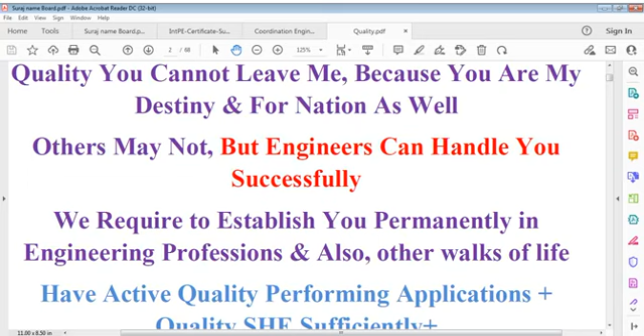Means I talk to quality, though there is no physical form of quality I'm talking of. I cannot say I'm talking, I just imagine this is quality and I'm interested in talking to you. And this means I am interested in talking to myself. That's the only thing, because I assume there's a quality, and quality is an imagination, an image, but it's no image - it's in my mind.

Just to tell people means what I'm thinking about. It's a kind of contemplation of my mind. I talk to quality and coordination. This is neither coordination practical or physical, nor quality - neither both are.

So we talk to ourselves because I am sleeping, my own, I'm sleeping, I'm not awakened, way others are sleeping. So during sleep you talk to some soul. So I miss my soul, when my eyes are open I work. So for that I say I talk to someone and I talk to myself.

And myself is not a friend, I want to make it friend. Because there's a distance between my physique and my soul, and that distance will be bridged by my own design. That's why I say quality and coordination is that bridge, which is very important. And that importance forces me to do something that's required.

And we say that we have to establish quality permanently - permanently means in your mind permanently. You should not think below some level of quality. Yes, you can think of working on that, how to design that, but you should not go below that level, and you have to fix your level yourself. Nobody will fix it for you. Designer can fix and you can fix, and both can fix together.

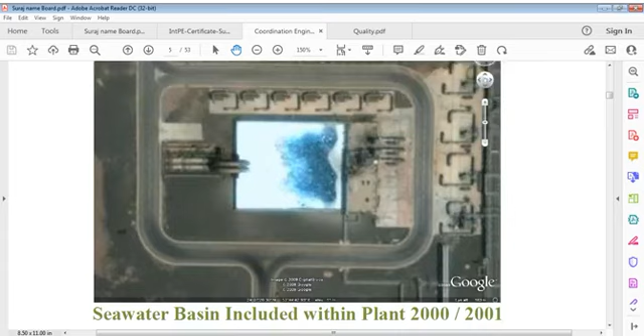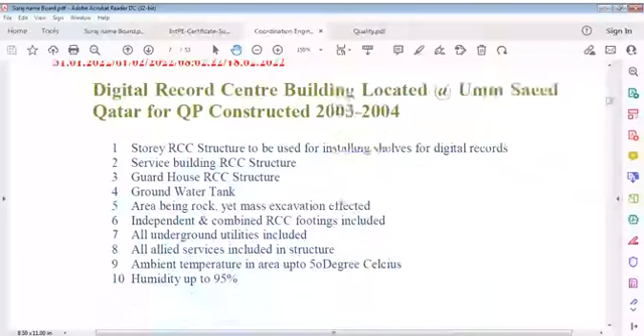So much is involved in this, though it's a very small part of the major project. The seawater basin here works like that, and we have to see that. The record building, we'll talk of that also. These images I've generally taken from Google Earth, don't take it otherwise, though I worked on these projects everywhere.

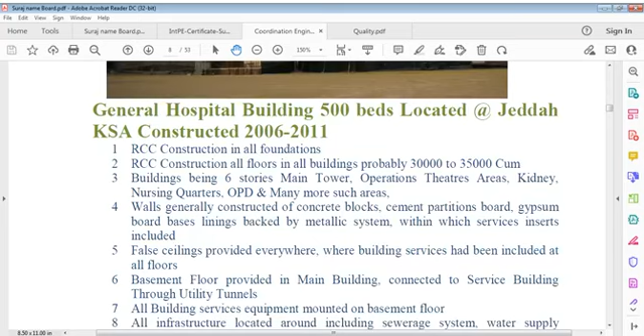This is from many projects in my career. This is a hospital building, and this also we will talk of. And also we have this LNG plant, which we have discussed already, but we'll discuss more.

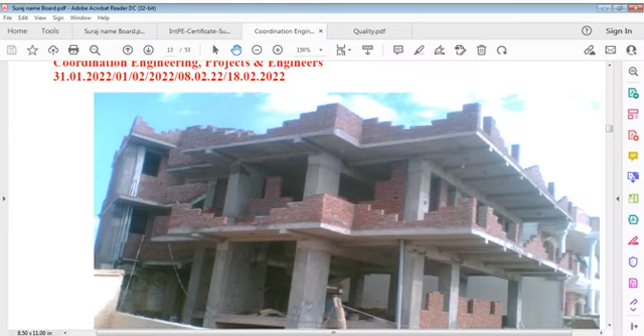This is during construction stage. There is another building also in initial stages of structure, already done - I'm just taking from my career projects. This very small house, you can see RCC construction there and brickwork.

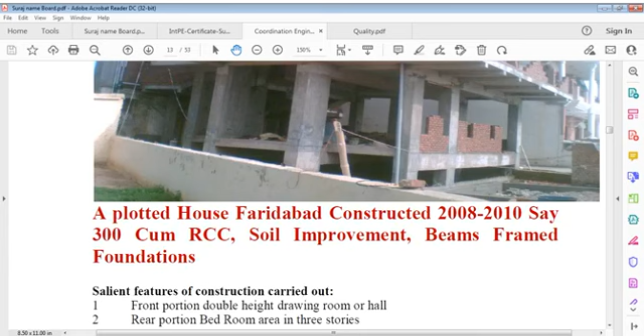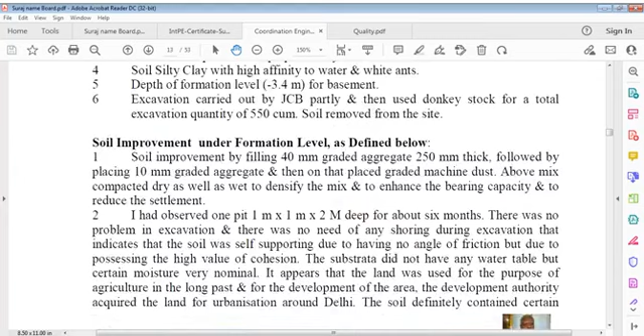Say 300 cubic meters, a small house, not big, but 300 cubic meters, not a small quantity for a house. Soil improvement, beams, framed foundations, etc. I like to add, I like to repeat this. You can say there's a long note here, which I can read for you if you wish, just for information.

It's talking about the salient features of construction carried out, and if you can blow it up, I think it's better. It's at 150, I think we can't blow more than that, so it won't work, so we keep it as it is, no problem.

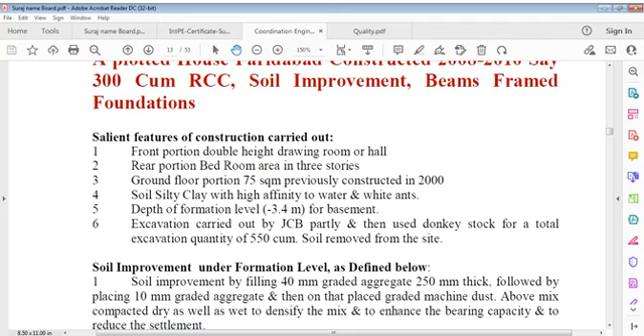So we have to see the front portion, double height drawing room or hall. This is in front, this is the drawing room, we generally call it a drawing room in houses. And also its rear portion has bedroom area in 3 stories. Before all this, I can show you a little glimpse of the plan.

If you see this, only a few of 2 drawings I have put, not all. I can blow it up for your reference, it's better to blow it up for you. You can see this here, it's a kind of plan here. I cannot blow it up more than this, so let me blow it up to 200, let's say 250, so that it is clear to you.

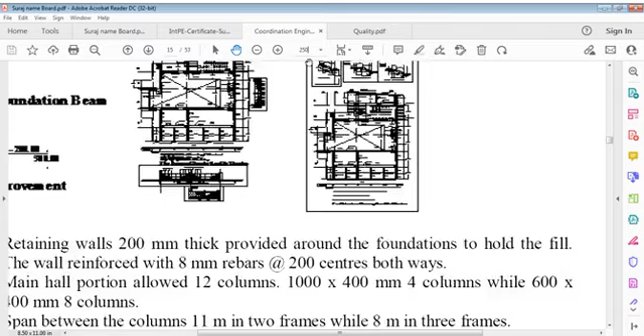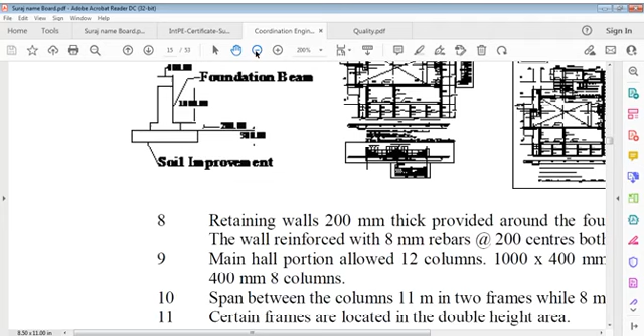This kind of plan, showing the front portion and the rear portion here, and these are drawings at different levels. This line means no floor at this level, meaning double height. And there is a foundation plan here. This is only a few sketches I added, not all - I'll show you all one by one, but now I'm trying to explain about the soil improvement, etc.

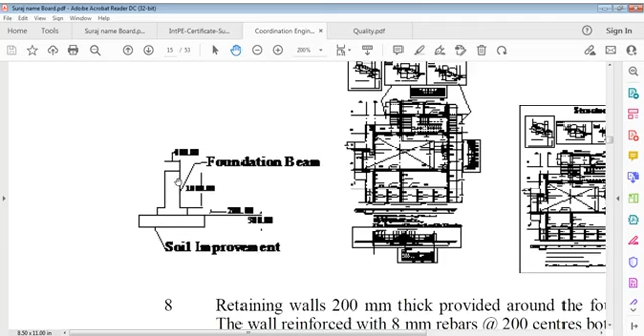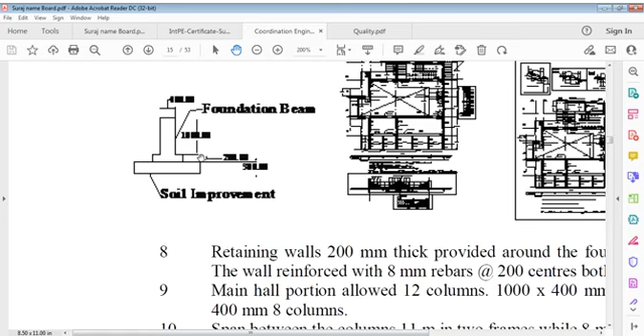It is foundation here, that's important point. You can see this is foundation, and it's written soil improvement here. This is foundation, a soil improvement, this is a rectangle, you can say, in sections I'm showing to you, and this is foundation here, RCC foundation in form of a beam, titled foundation beam, and depth is clear here, but not readable at this moment. We will read this is say 200mm thickness, and this is 1 meter or say something else, and whatever design thickness comes, we have to provide that.

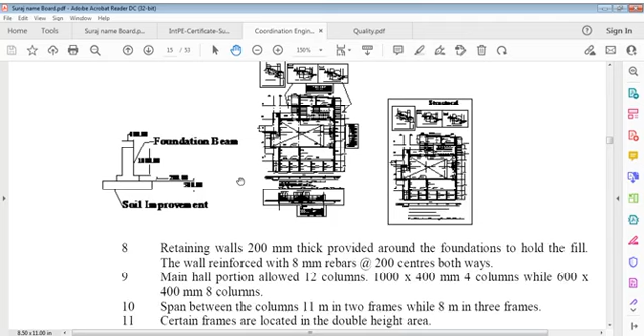So continuous means it's not just a foundation or isolated footing, it is in continuation all over there in foundations. I'll show you later on. I'm just giving you a glimpse of this, what we have to talk, and I can read for you what is there, what's not there, and we can see that.

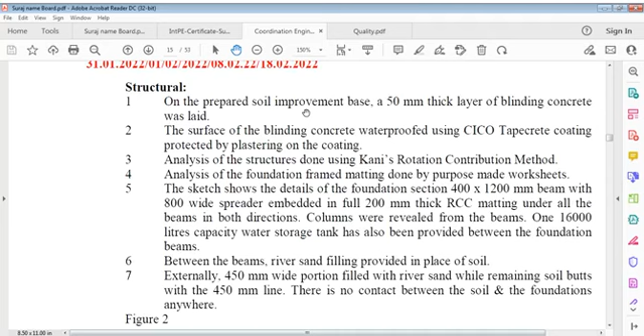Here is what it is. Yes, it is about this house. I did it for you so that you can understand. Again, I say what is this? This is a plotted house Faridabad. It can be anywhere. I'm just taking this.

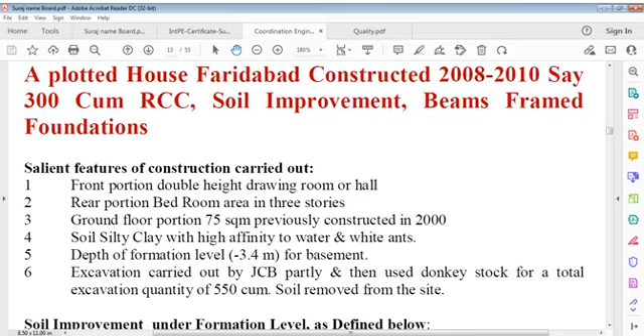Salient feature of construction, this is a very minimum requirement salient feature. It is front portion double height drawing room or hall, as I showed to you on that drawing. Rear portion bedroom area in 3 stories, and it's a ground floor portion, 75 square meter, previously constructed in 2000. So you can say it is a small portion constructed about 22 years back, and soil is silty clay.

With high affinity to water and white ants. When I say high affinity, it means it is clay. Certainly it is porous, we know that property of clay. It's porous, it's high, it's porous soil, and of course it's important. It's not good for foundation, but we'll talk of that.

Then depth of formation level is minus 3.4 meter because it constitutes a basement also or cellar floor. That's why it's minus 3.4 meters, meaning from plinth level down to 3.4 meter formation level.

Excavation was affected by excavator, we call it JCB, that's a company name, but it's an excavator. Partly it was done by excavator and partly by taking out soil using donkeys, because in depth the machine could not go into the constrained area. So excavation was carried out by JCB partly, and then used donkey workers to remove soil from site. Now this is just a small

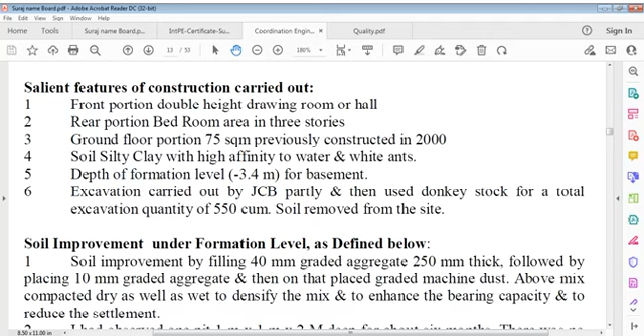They should be happy, or they should please know all this, because this relates to the life of everybody. So then I say soil improvement under formation level as defined below, and this is very, very important, significant item. Well, I think every member

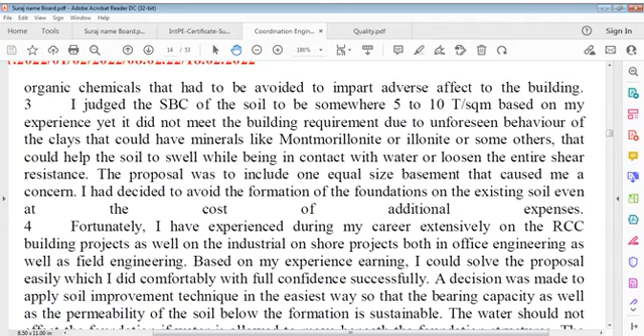Fortunately, I have experienced during my career extensively on RCC building projects as well as on industrial onshore projects, both in office engineering as well as field engineering. Based on this earned experience, I could solve the proposal easily, which I did comfortably with full confidence, successfully.

A decision was made to apply a soil improvement technique in the easiest way, so that the bearing capacity of the soil as well as the permeability of soil below formation is sustainable. By sustainable, I mean water should not affect the foundation, if water is allowed to move beneath, it should remain beneath.

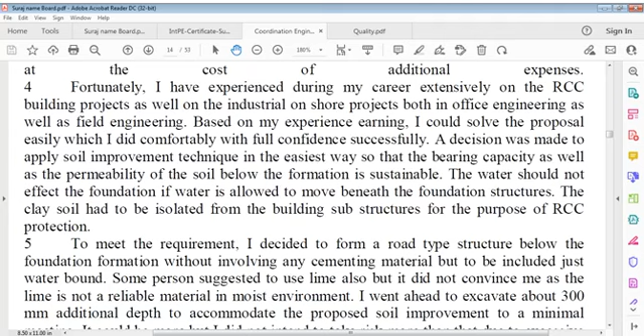A decision was made considering bearing capacity as well as permeability of the soil below, which are very important here, to decide whether water should be added to the site or not. It's a very important part, we'll decide that, and to meet this requirement we consider a fill or soil improvement.

It is a kind of small road structure, a water-bound type road to meet the requirement. I decided to form a road-type structure below the foundation formation without involving any cementing material, no need of cement, just water-bound. Some suggested me to use lime also, but that did not convince me, as lime is not a reliable material in a moist environment.

I went ahead to excavate prior, so we have to concentrate on these points one by one and see what that is. I went ahead to excavate about 300 millimeter additional depth to accommodate the proposed soil improvement, to a minimal extent.

It could be more, but I said I did not intend to take more risk than that, due to excessive depth of excavation, where on two sides there was an existing building.

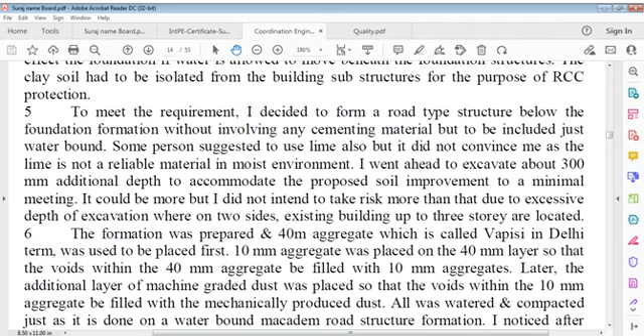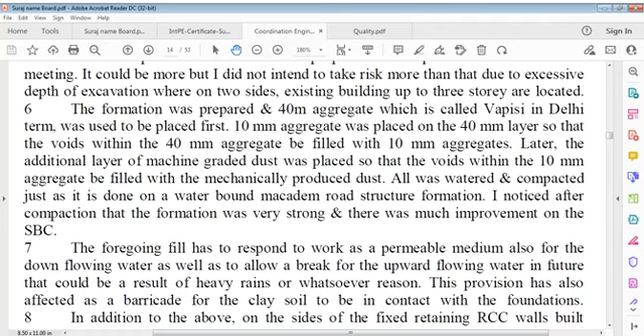All was watered and compacted, just as it is done on a water-bound macadam road structure formation. It was noticed after compaction that the formation was very strong, and there was much improvement on safe bearing capacity. That was our milestone, to increase bearing capacity of the formation level.

So this was just one very small part of the improvement. And so for the foregoing fill, we call it fill. Of course it's an improvement part, soil improvement part, but fill. This fill has to respond to work.

Foregoing fill has to respond to work as a permeable medium, permeable medium also for down-flowing water. What do you mean by that? You understand permeable medium? What I mean by that?

It is a graded section, you can say graded fill. Graded in a sense that 100% voids are not filled. Permeability factor works there, it's not porous. It's opposite to the property of clay. When we talk of clay, we talk of porosity, pores. Clay has pores, we cannot fill those pores, and that's why we call it porous soil.

Clay is porous. It can have much water content in it, but this water content cannot move, cannot be mobile. But when sand is concerned, it is opposite to clay. Mobility of water is permissible in sandy soils.

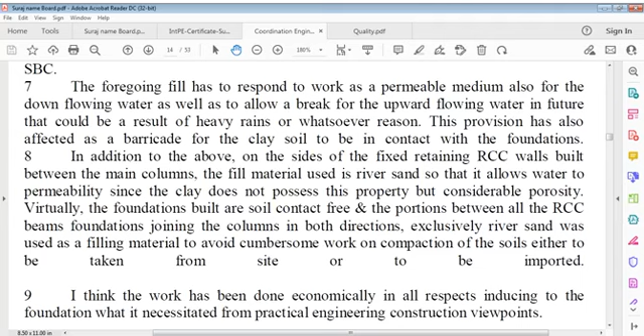Now we go further on this, that we got this improvement, and we use river sand. Of course, we avoided time wastage. Beam foundations were used between columns in both directions. Exclusively river sand was used as filling materials to avoid cumbersome work.

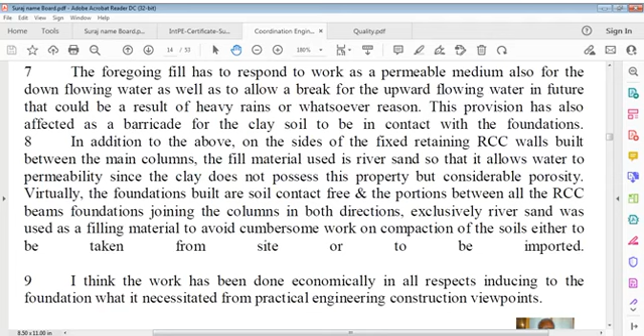Now we go forward. I think the work has been done economically in all respects, inducing to the foundation, what it necessitated from a practical engineering construction viewpoint. Now, what is it we're talking of? Oh, that's a very important point.

On prepared soil improvement, let me see—I'm feeling a little cold, why it's cold, that's the important point.

It's 14°C and the dew point is 8°C, a little less than 15, so expected is 27 in the day and 13 at night. So it is 14 degrees now with 45% humidity and 8 degrees dew point, and that's why I'm feeling a little cold now.

So we are talking on prepared soil improvement base: a 50 mm thick layer of blinding concrete was laid. It can be 50 mm, you can do more also, no problem.

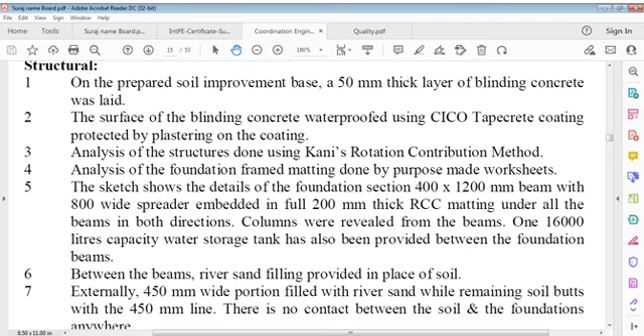Retaining walls, 200 mm thick, provided around the foundation to hold fill, with wall reinforcement using 8 mm rebar.

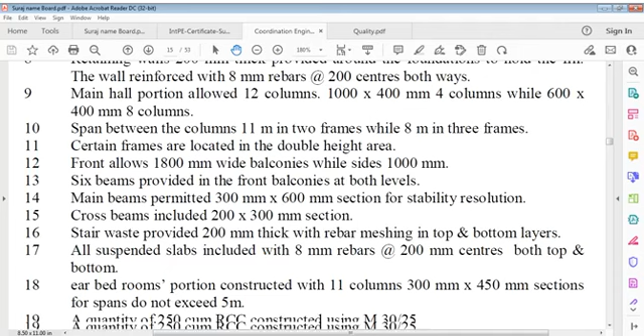So the retaining wall was there. Now we can just show a glimpse of this drawing first.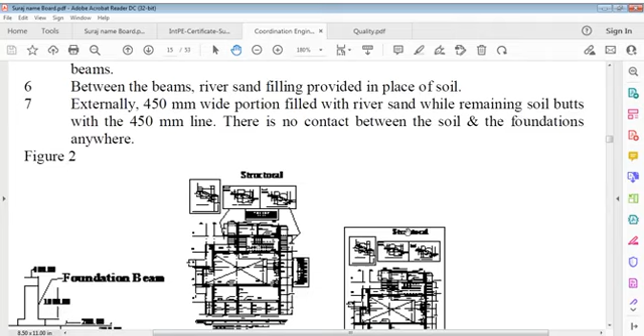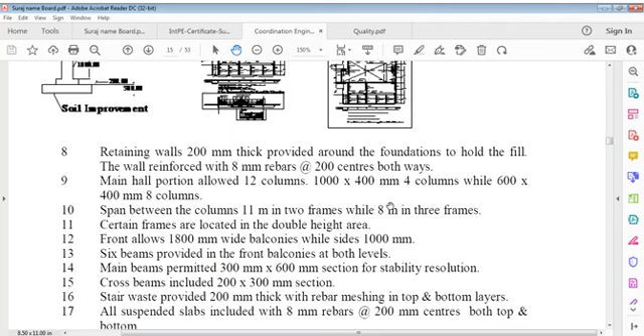You can see this foundation. Now, retaining walls 200 mm thick are provided around foundations to hold fill. Wall reinforcement uses 8 mm rebars at 200 mm centers both ways. The main hall portion has 12 columns: 1000 by 400 mm for 4 columns, while 600 by 400 mm for 8 columns.

Hall columns are 1000 by 400 mm at total height, and 4 columns of 600 by 400 mm, 8 columns also at total height. Span between columns is 11 meters in 2 frames, and 8 meters in 3 frames - 11 meters and 8 meters. Certain frames are located in the double height area.

Front hall has 1800 mm wide balconies, while sides have 1000 mm wide balconies. 6 beams are provided in front balconies at both levels. We'll show that later on. 6 beams provided in front balconies at the bottom.

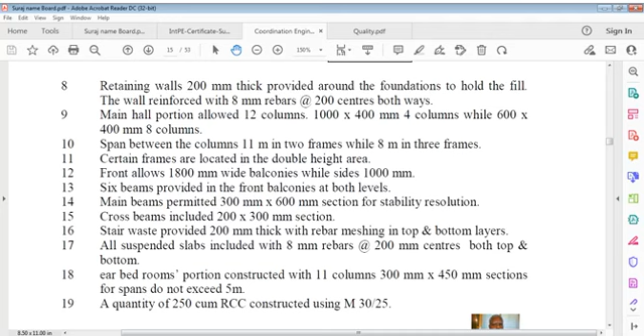I think if you see this, it's clearly here. If you can see, I'll show you that sketch. I think it's somewhere in the plates - if you go back.

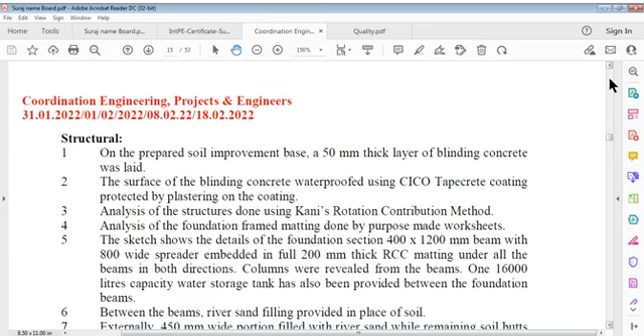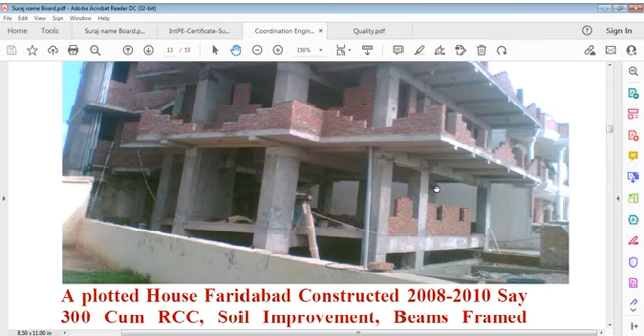This is a glimpse of what I said. If you see the basement here, you can see 3 columns here and 2 columns - one here and one other. Here, this column is the main hall column, and this one as well is also a main hall column. So this is one frame, this is another frame, and this is another frame.

Likewise, these two frames form the house, and there's another 3-column frame here - the staircase is here. You may see that.

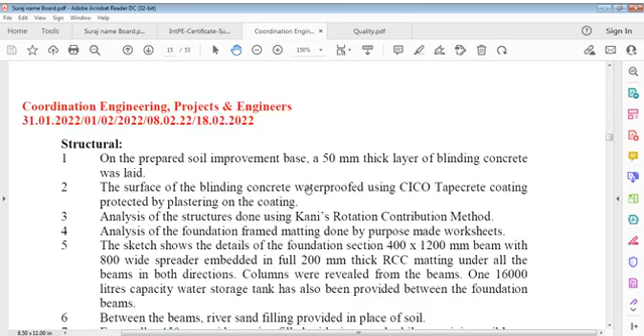This is the beauty of this building, structural beauty. You can see that. Here is that one, so let me read it for you. It's written here, and it's there.

You can see the retaining wall. It's a little boring there. I'm going slow. So the cross beam is just shown to you - 200 by 300 section. Stair waist is 200 mm thick.

200 mm thick stair waist with rebars meshing in top and bottom layers. Not an ordinary stair as usually we do - I converted that to a beam, with top mesh and bottom mesh, 800 mm mesh.

Here all suspended slabs included with 8 mm rebars at 200 mm centers, both top and bottom, no temperature reinforcement, main reinforcement, one reinforcement. You know, it's like double reinforcement.

Steel beam theory, you can say here. Tension reinforcement and compression reinforcement are equal. We provided this compression reinforcement for the purpose of reducing deflection as well. Though the deflection is not much, we did that in the slab.

You can say a kind of duct arrangement is provided in the slabs, suspended slabs - a kind of duct reinforcement. It adds to control deflection as well as providing upheaval controls, hogging controls, and sagging controls. You may say it's hogging moment control or moment resistance that can hold hogging and sagging shapes - meaning sagging control is not the main consideration, hogging is the main consideration. I'm trying to tell you what this is.

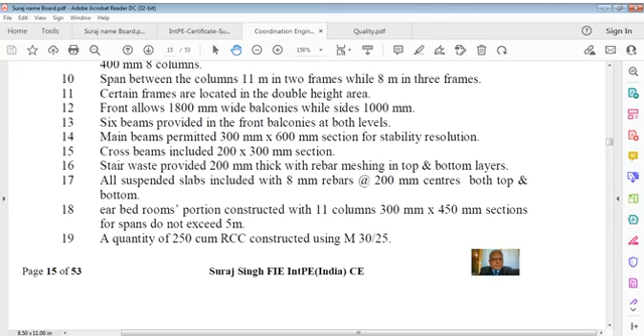And we can say rear bedroom - the R is missing here, no problem, we'll check it. Rear bedroom portion constructed with 11 columns, 300 mm into 450 mm section, for spans not exceeding 5 meters. A quantity of 250 cubic meters of RCC constructed using M30, M25 grade concrete.

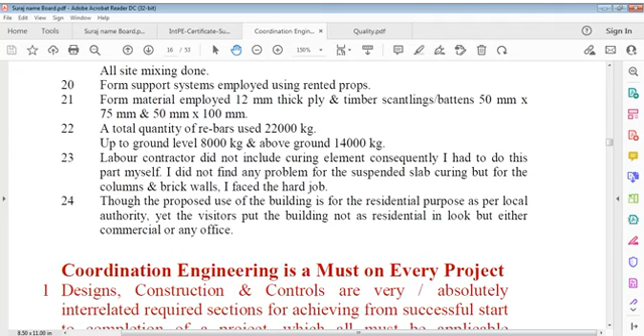Coordination engineering is a must on every project. It's a very important one. When we talk of coordination, we talk of our own work, our own controls - you may call it self-control. No one controls you, because your ideas, your thoughts, your contemplations, your internal mind's working is immersed in that. There's no one to tell you what to do.

You have to search out yourself what you have to do. It's engineering work, it's engineers' doing - a person who doesn't know engineering cannot do coordination, that's also required. Coordination is automatic. You have one object which is the coordinate object, and you yourself are the coordinator, and the other part acts as coordinated for you. So you and the object coordinate, you have one relation, and they have to link to another relation, and it's called coordination. There can be many persons in coordination, or there can be just 2 persons.

That's also beautiful work. Coordination is your own design - how to design coordination, though it's not really designed, but we can take it that way. You have to find out the requirement yourself, and that's the design. You have to find out the requirement, how to adjust this, how to allow this - basement major beam, and the next goes to.

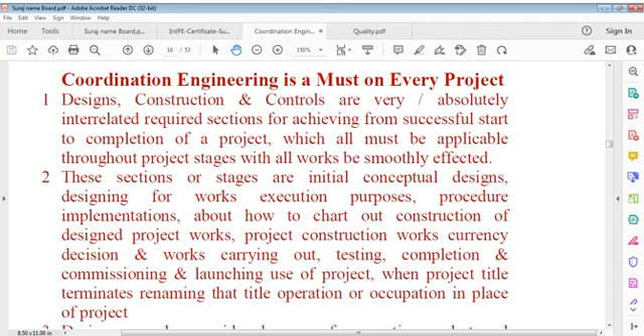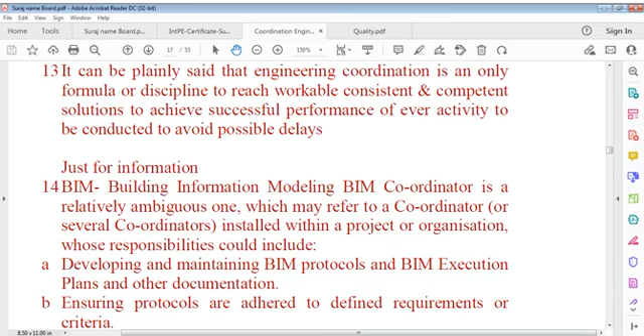That's the beauty, you can say. I'm not claiming don't use BIM, but I think BIM stays in your mind. It doesn't stay anywhere else - it stays in our minds, and we have to control that.

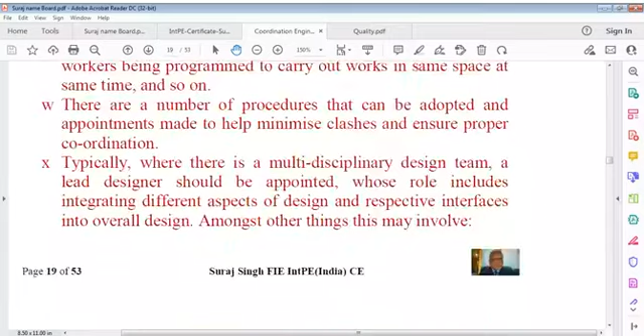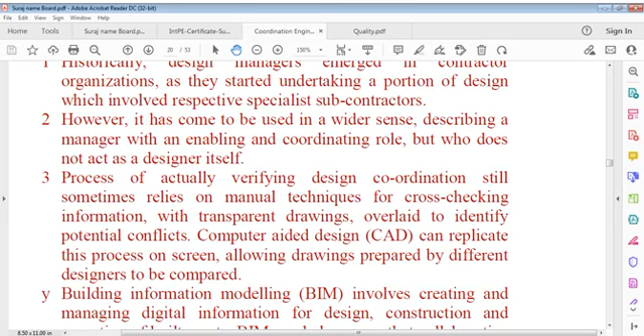Now there are certain points that we can say are important here - meaning you have to think for yourself. We cannot depend on others to let us know what to be done. We have to do it ourselves.

Coordination is a process of mind in relevance to information, competence, and practical speaking - I'm not defining that formally. Coordination is a process that works with the mind. It doesn't tell you its physique, but it tries to tell you where you have to refer to. When some question is asked by the mind, the question is replied to by the mind itself.

Or you use your mind, you ask somebody, some other person who relates to authorities, and they raise a question - I want a response on this item. And then the mind says you have to search documents, and once you search the document, you find relevance. So your mind accepts this - the mind says yes, this is workable, this is preferable.

And likewise you can say coordination is self-question and self-answer. Self-questioning and self-answering - this is self-question because you are sure about that job, already completed a few percentages, and for the rest of the time you are going to catch up further, you have to open them further. Therefore coordination is not dependent on someone else.

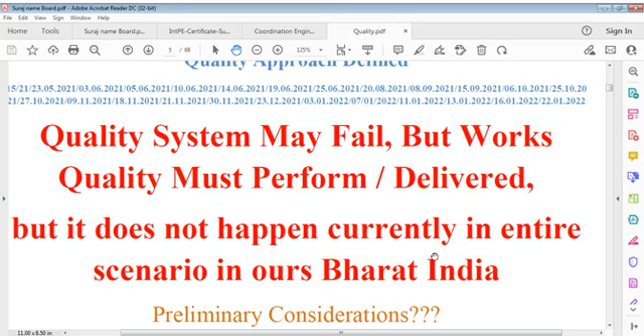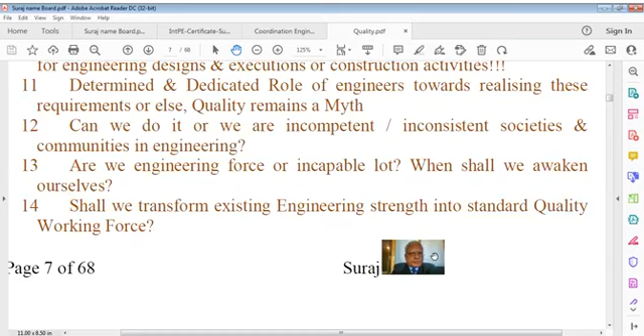Here also, engineering detailed deliberations must - means information must be brought to those personnel who require it. It must be provided at the right time, for the right requirement, and quite rightly, duly originated.

In name of some unrequired suppositions, we should not do that. We should not run away from requirements of, you can say, coordination. And coordination means it involves every engineering topic - I'm not just particularly talking of the foundation point. It says that requirement cannot be stitched together.

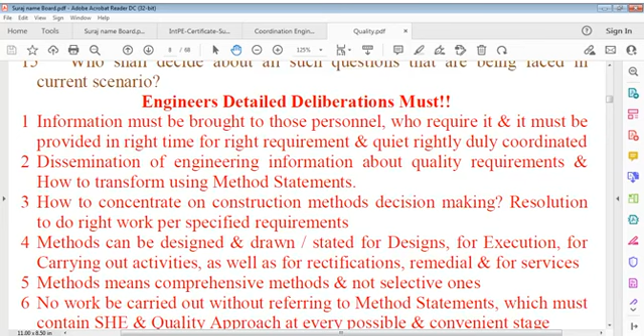We have to understand these points very clearly, that dissemination of engineering information about quality requirements and how to do that - all very significant points. And if we can do that in a nutshell, we can be meaningful. I have experienced, interacted with people, engineers, that for many, the issue of coordination does not suit them - they don't want to coordinate, but just seek information.

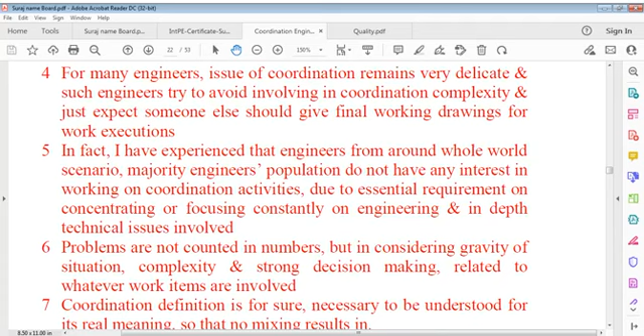Also we can say, when we talk of coordination, we talk of something very concrete. We have to understand that point. No mixing should be allowed in coordination - it should be real coordination, factual coordination. And coordination means whatever solutions we chart out, that should impact the adjacent member in both directions. So that part also we have to keep in mind. It's not simply structural or architectural, it's a combination of both architecture and structure.

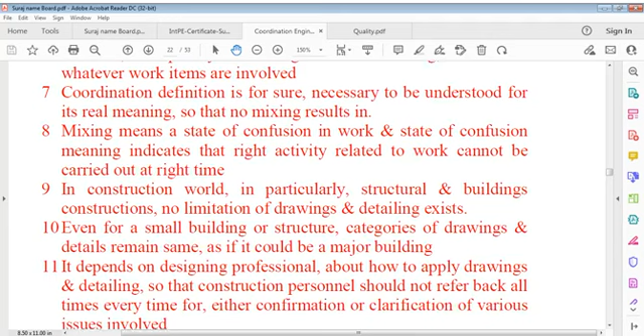And generally, a lot of work you have to do in coordination, in physical form, and that is really very much appreciable, but it means intensive coordination - you can say we have to do it to find what we are required to do.

So you may say coordination can be defined likewise: that all disciplines involved in an ongoing activity must be clearly described and detailed, so that no information is left out that could hold up progress on the activity or any part of it. That point you have to be very serious about - really very serious about, we should be in that case.

And because it is a coordination issue, it's a very, very critical issue - critical in the sense that people do not conduct it, and that is really worrisome. It affects everyone, because this is very, very important material we have to address. That's the reason I always stand on the effects of coordination, and I've started this title coordination because it's missing, and no seriousness is seen because of some unknown factor. We have to be serious about that.

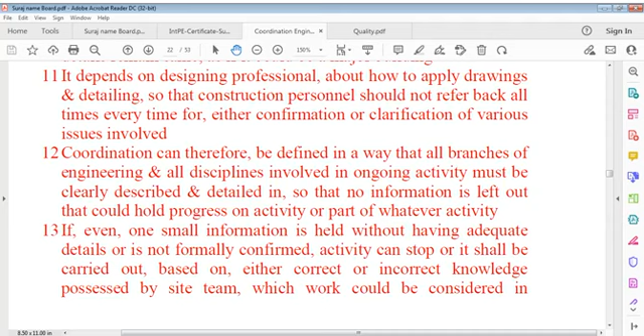Coordination cannot be taken for granted. We understand this, and it's a very important point here we have to see. We cannot take it for granted. It has to work.

As I said in this note, engineers have to understand this. If even one small piece of information is not given, or is held without adequate details, or is not formally confirmed, activity can stop and it holds up work.

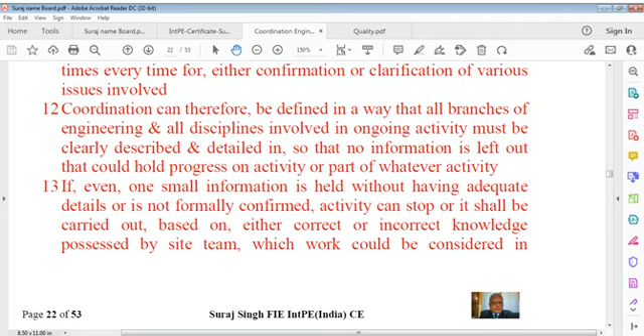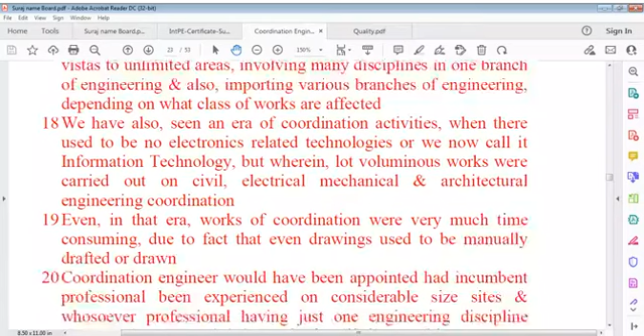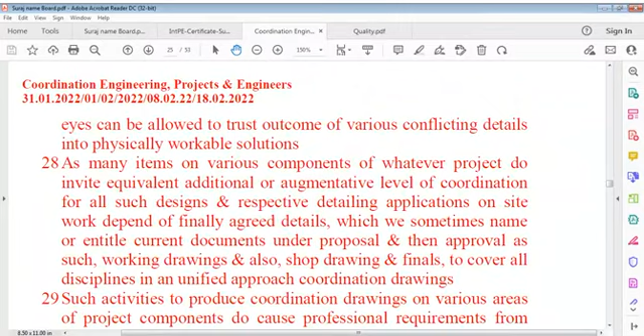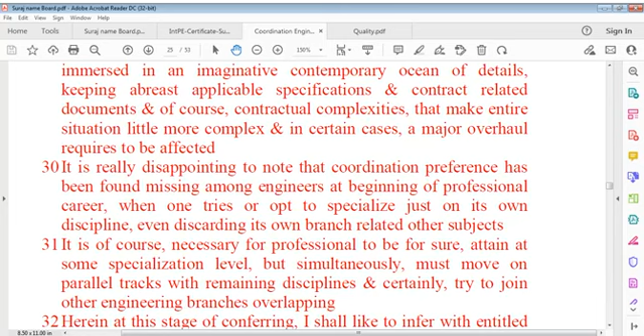Coordination among members based on good communication - we should not forget it's also the duty of ourselves, engineers. This is our duty, to let them understand through whatever communication means. We have to explain to them technical requirements, concrete particularly - why we should not add more water, why we should maintain temperature of concrete, why we should cure. At least this we can tell them, we can educate them if we know them.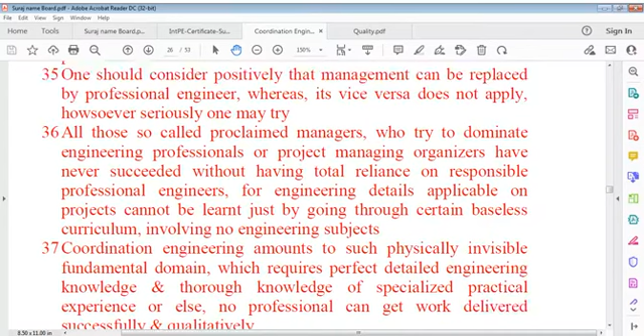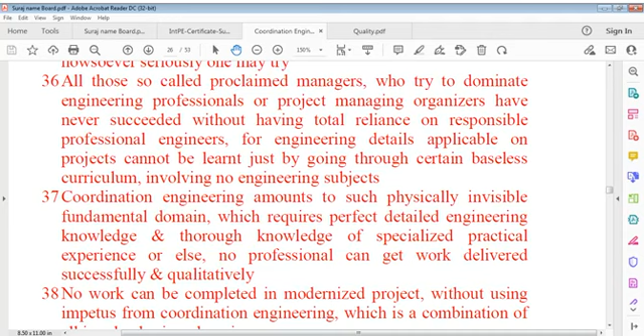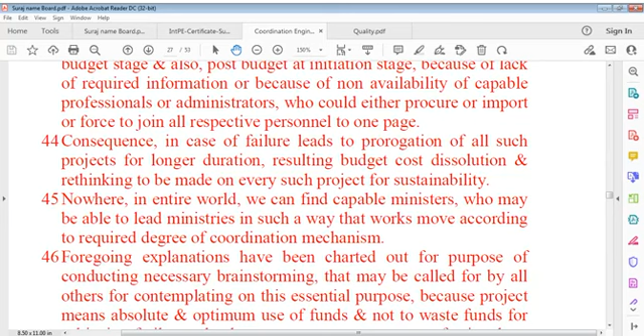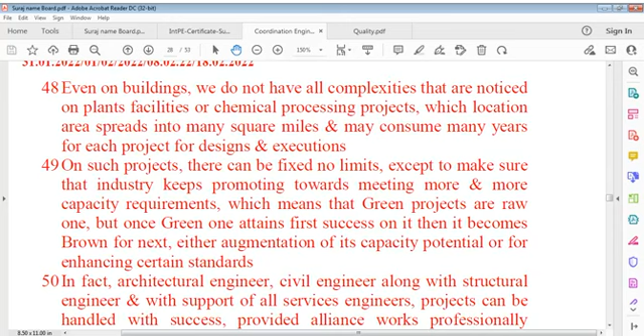In addition to coordination processes, which is a continuous process, we'll also take up some concrete technical requirements from specifications. Sometimes this, sometimes that, so that information is given to you. I also discussed with you many methods through many videos, method statements, and quality issues. And I'll take up some designs, architectural, town planning coming time - that's a very important facility, a point we have to consider one way or other way.

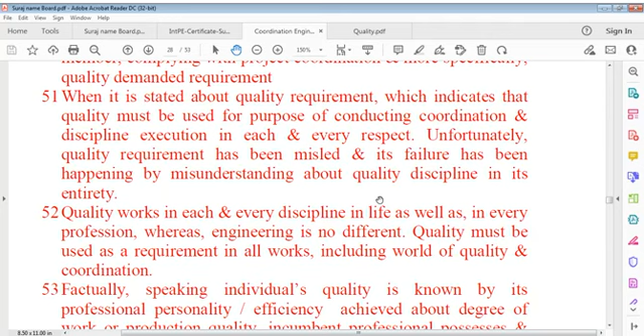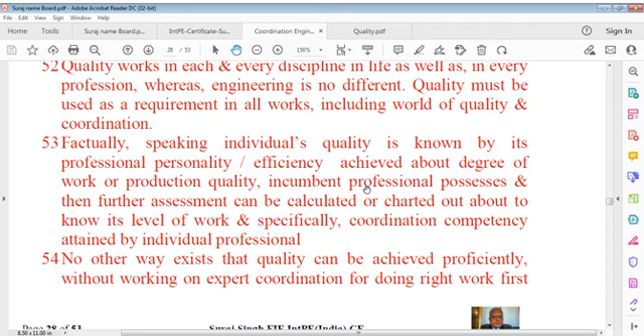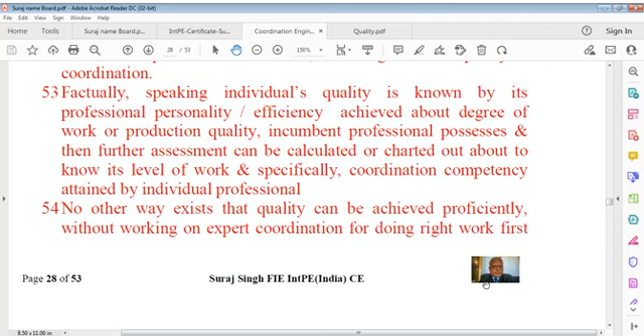Quality works in each and every discipline in life as well as every profession - engineering is no different. Quality must be used as a requirement in all works, including world of quality and coordination. Factually speaking, individual quality is known by its professional personality, efficiency achieved, degree of work or production quality the incumbent professional possesses. Further assessment can be calculated or charted out to know its level of work, and specifically coordination competency attained by individual professionals. There is no other way that quality can be achieved proficiently without working on expert coordination for doing right work first time, every time, and controlling use of each and every resource at optimum level.

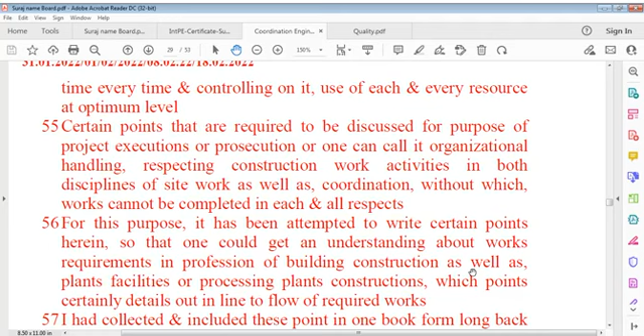Certain points are required to be discussed for purpose of project execution or prosecution, one can call it organizational handling - respecting construction work activities in both disciplines of site work as well as coordination, without which works cannot be completed in every respect. For this purpose, it has been attempted to write certain points herein so that one could get an understanding about work requirements in the profession of building construction as well as plants, facilities or processing plant construction, which points certainly detail out in line to follow the required works.

Again I say, for me, quality is a destiny, it's an objective, it's a mission. But coordination is also parallel to that, because in this mission, coordination is very important. As coordination is important in the project mission, where there is a project for someone - or you can say itself a professional goal we have to achieve - it doesn't mean to have a higher position only, or to get more salary or remuneration. My goal is not that. It was never, had never been. How much you can know, how much you can experience, and how much can you apply.

You see, we have experience. If experience is good, it's worth it, it's reliable, then we can improve it by further application, because we have learned a lot. But if you do not learn anything new, and just go the way it has been going, then that cannot be called professional work or professional act, because professional work requires further advancement on advancement, and further advancement on that advancement. That point we have to be clear about, we have to be sure about.